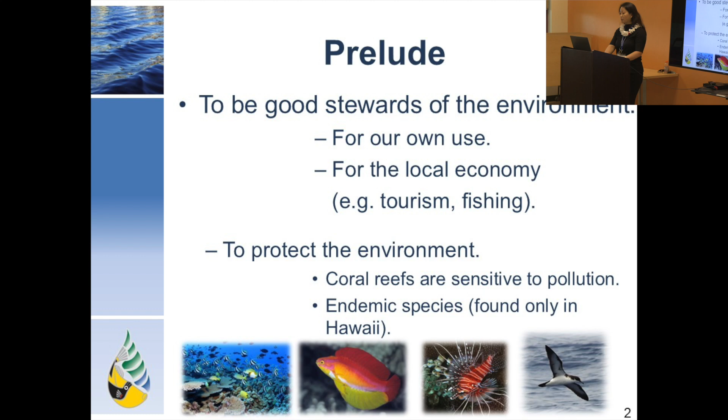Moreover, it is our responsibility to protect the wildlife, including many only found here in the state of Hawaii. To continue sustaining in this world, we need to do our part to ensure that our coastal waters are clean for every living being to enjoy.

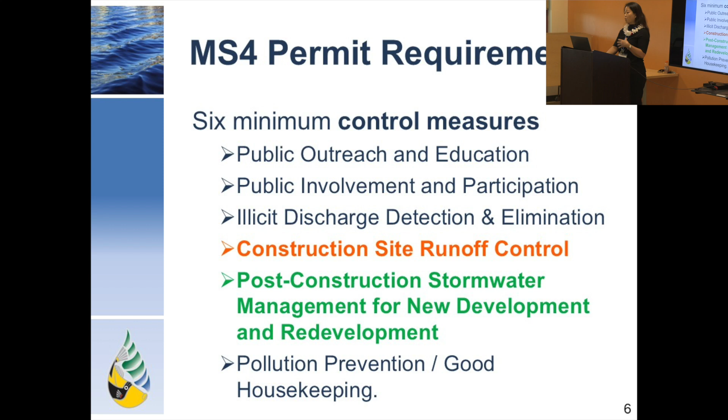So the small MS4 permit, as the one issued to Harbors, requires the development, implementation, and enforcement of our own SWMP, covering the 6 minimum pillars listed on this slide. For today's session, we'll be focusing on construction site runoff control and post-construction stormwater management for new development and redevelopment.

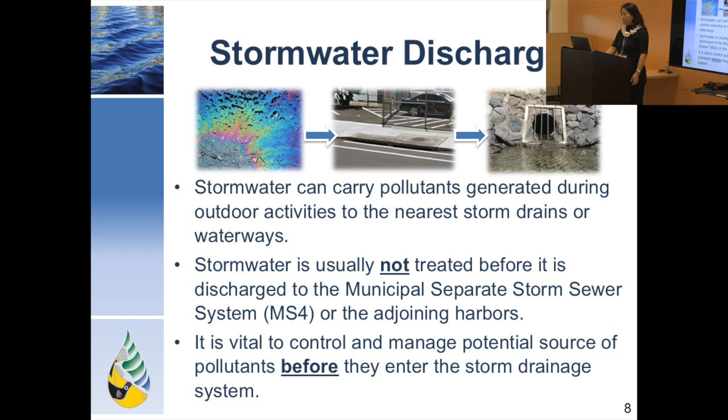So how exactly can construction activity potentially impact the environment? I think a majority of people attending the training session today are experts of different firms. Impacts can occur when stormwater runoff carries pollutants from construction sites to nearby storm drains or waterways. Once the stormwater has entered the storm drain system, it flows and discharges directly to the adjoining receiving waters. Therefore, it is essential to manage and mitigate the contact of rainwater with potential sources of pollutants before they enter our storm conveyance system.

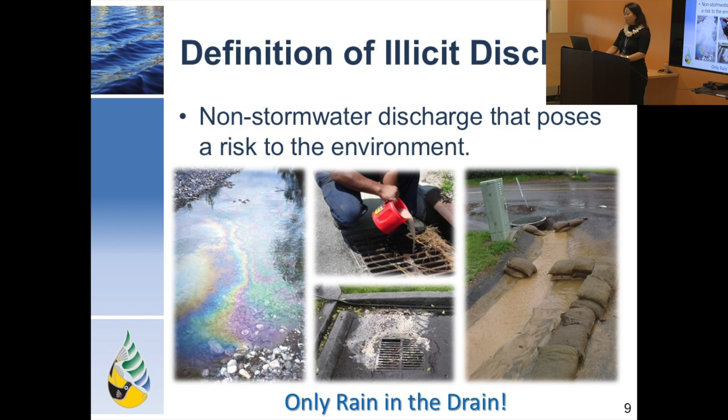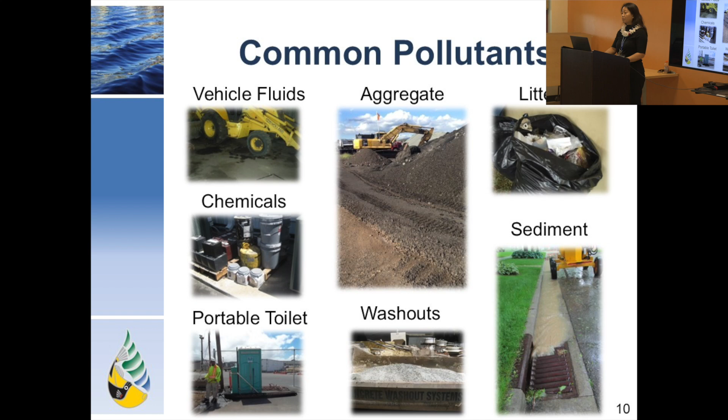Sediment is one of the most common pollutants found on a construction site and in our waterways. It can be generated through surface soil erosion or in situ soil excavation. Two key definitions are involved: erosion and sedimentation. Erosion is a process by which the land surface is worn away by the action of water or wind, and sedimentation is the movement or settling out of suspended soil particles.

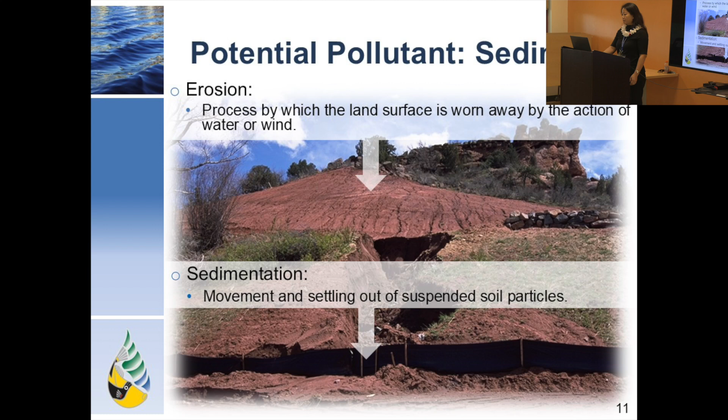Storm drain systems of different kinds are usually designed to minimize localized flooding by collecting and diverting stormwater away from roadways and ground surfaces. If not properly contained or managed, sediment can easily fill up storm drains and catch basins and clog pipelines, consequently causing damage to the local environment and public health. Also, excessive nutrients from the sediment can increase algae growth.

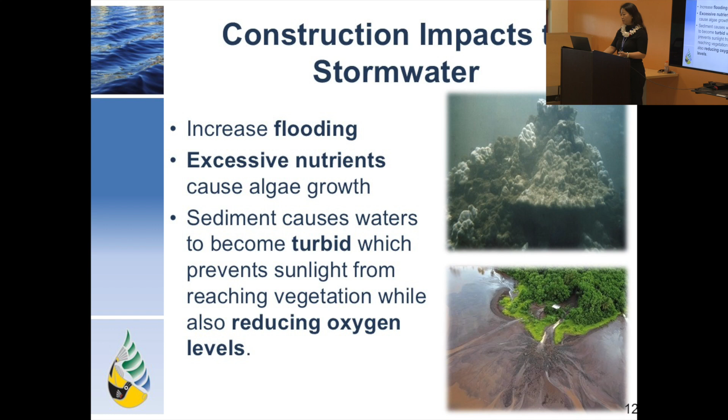It can also cause the water to become turbid, reducing or preventing sunlight from penetrating through and reaching the corals, and subsequently reducing oxygen levels that may impact marine life. That's the flow.

If your project will disturb 1 acre or more, or it is part of a larger common plan of development or sale, it is very likely that your project would be subject to NPDES program requirements administered by the DOH Clean Water Branch.

HAR 11-55, Appendix C, outlines the requirements for regulated construction sites. Keep in mind that all NPDES regulated construction projects within Harbor's jurisdiction are not only subject to DOH inspection, but also subject to Harbor's construction site inspection as well.

Starting with this slide, we will be reviewing the project forming and execution process at Harbor's, to give the audience an overview. A typical project at Harbor's will generally follow the process shown on the slide, which includes project scoping, then design, then review, then followed by construction.

And if there's any PBMP involved, or other purpose for the particular construction, it will also be subject to long-term operation and maintenance. So we'll dive into this in the next few slides, with a focus on the environment and stormwater management department.

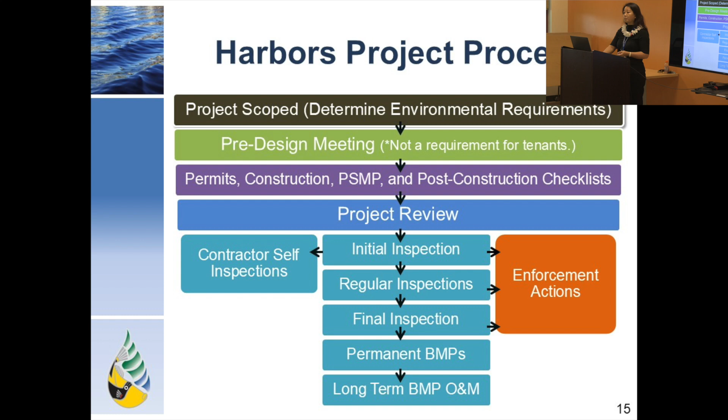During a project's design phase, the scope of the project will be finalized by the design engineers, and the relevant environment requirements will be assessed and identified. If needed, a pre-design meeting will be held, depending on the complexity level of the project, and the applicable Harbor's forms listed here should be completed by the design engineers.

For non-exempt projects less than 1 acre, the design engineer will need to complete a notification form for projects less than 1 acre. For projects subject to NPDES NOI C permit requirements, in addition to the NPDES application and preparation of the SWPPP, the design engineer will also need to complete the construction design review checklist, the post-construction BMP plan review checklist, and the post-construction stormwater management plan.

I was just sitting in on an airport program, and it sounds like they have a very fancy system in place to manage a project from cradle to grave on the environment side. That was a very efficient system of work. If that's applicable to Harbor's program here, maybe we'll do something similar to help streamline the process down the road.

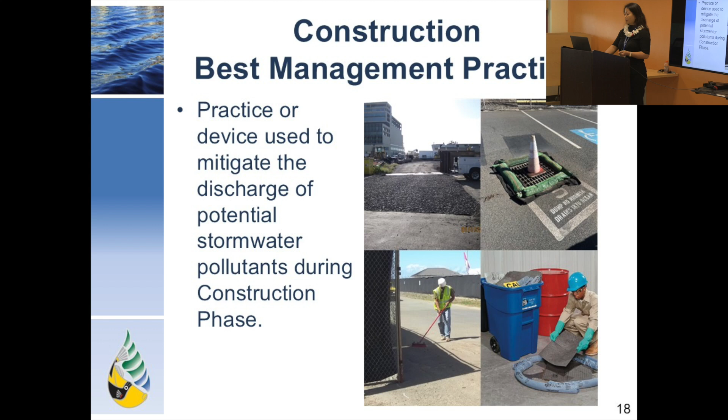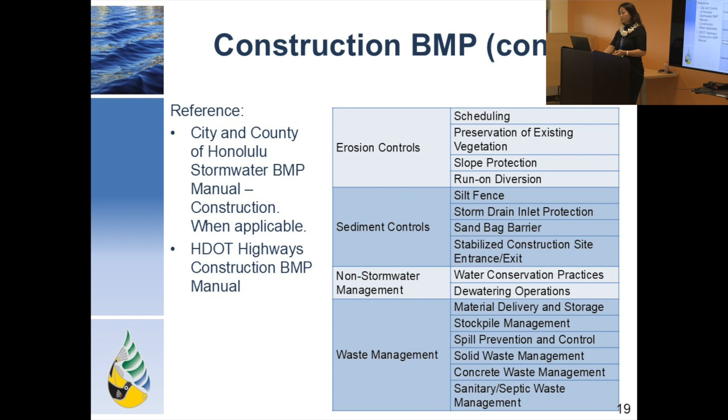Harbors has adopted the city technical rules, the BMP manual for construction, which provide information about the design details that should be followed. Any applicable BMPs from highways or airport construction BMP manuals can be considered acceptable. The BMPs listed here are some examples from city and county construction. I'm not going through the full list, you can review it in detail once you visit our website and find all the details.

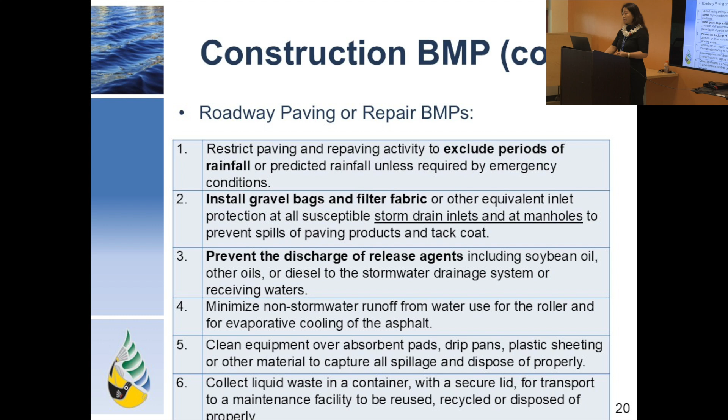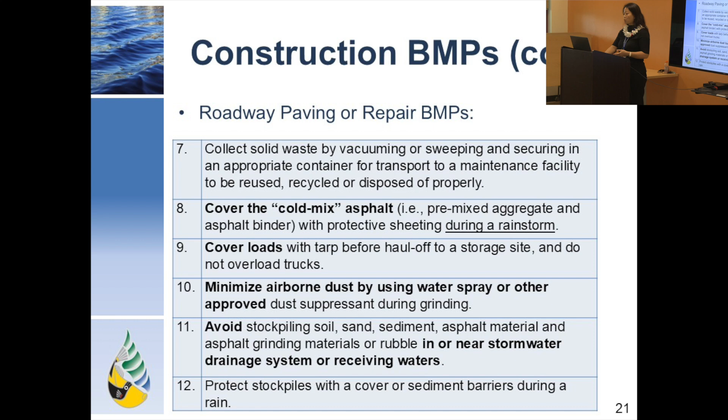If you're working on a roadway paving or repair project, please ensure you implement the BMPs listed on this slide and the next, such as paving when rain is not forecasted, covering all the storm drains, minimizing non-stormwater runoff, not overloading your trucks, and minimizing airborne dust by using sprinkler water on the site. The list can go on and on.

Next we'll be talking about Harbor's stormwater BMP inspections, and also we will share Harbor's expectations during the active construction phase. Harbor's stormwater management program requires inspections of non-exempt projects, those regulated by NPDES NOIC permit at the three harbors, namely Honolulu Harbor, Kalaeloa Barbers Point, and Kapolei. These inspections are conducted to identify potential or active discharge of pollutants and to ensure deficiencies are corrected to stay in compliance and to avoid being cited by regulatory agencies.

All harbor inspections include initial, recurring, and final inspections, to be conducted by qualifying inspectors. The initial inspection will be conducted after all applicable site BMPs have been installed. For the list of BMPs, we usually refer to the site-specific BMP plan or the SWPPP submitted for review and accepted by Harbors. Any deficiencies or potential violations noted during this inspection must be corrected prior to any further ground intrusive activities.

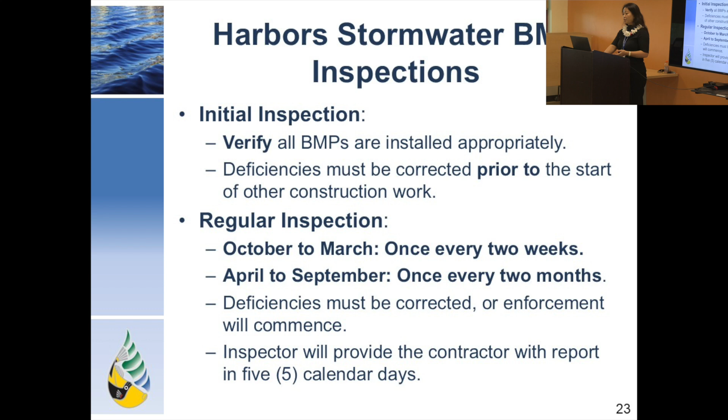Once construction work has started, Harbors will conduct a recurring BMP inspection for the duration of the project. This will occur once every 2 weeks during the wet season, which we define from October through March, and once every 2 months from April to September, which we consider the dry season. All deficiencies and potential violations noted during these inspections may lead to enforcement actions if not corrected promptly. A copy of the inspection report will be furnished to the contractor within 5 calendar days.

A final inspection will occur once construction work is completed and the site is permanently stabilized. That means no open soil, and everything either stabilized or paved over. At the same time, the inspection will also serve to ensure that the permanent BMPs called out during the design are properly installed according to specification. Deficiencies and potential violations noted during the final inspection must be corrected as well prior to completion of the project. Note that final payment can be held until all corrective actions are completed.

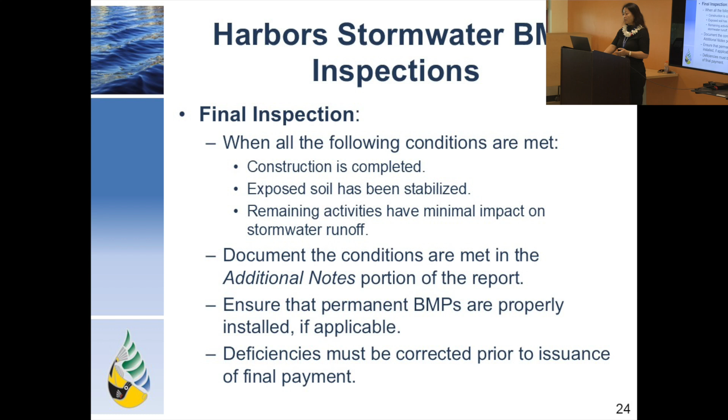Those are kind of standard language usually found either in the program manual or in the contract document.

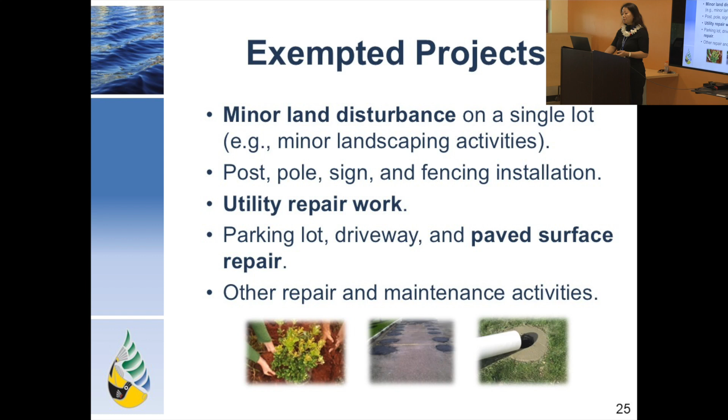At Harbor, we do exempt certain types of projects from inspections. These projects usually bring minimal impact to the environment, such as minor land disturbance, pole, sign, or fencing installation, utility repair works, pavement repair projects, or other minimal soil disturbance repair and maintenance.

All right, in the next following slide, we will discuss some common findings noticed from Harbor's inspection in the past.

The first one is the BMP plan is not available or updated. Remember that the BMP plan is a living document and will provide basic information not just to the inspector, but more importantly to the people working on the construction site. So it's a key document to maintain on site or easily accessible at certain areas. It should be promptly updated when necessary and must be kept on site. Make sure to obtain your project engineer's approval prior to updating the plan, so get consensus from Harbor's engineer before you update it.

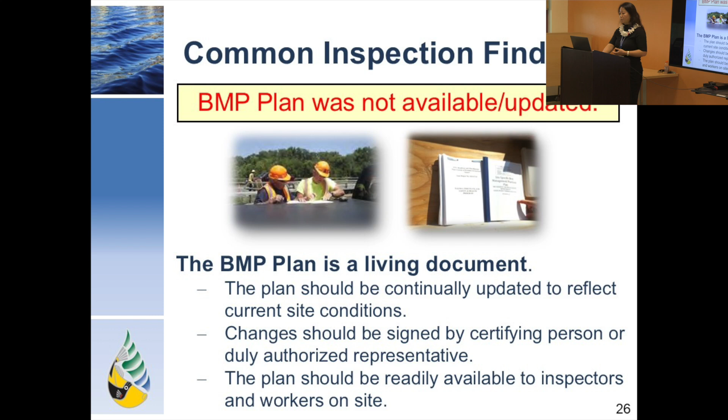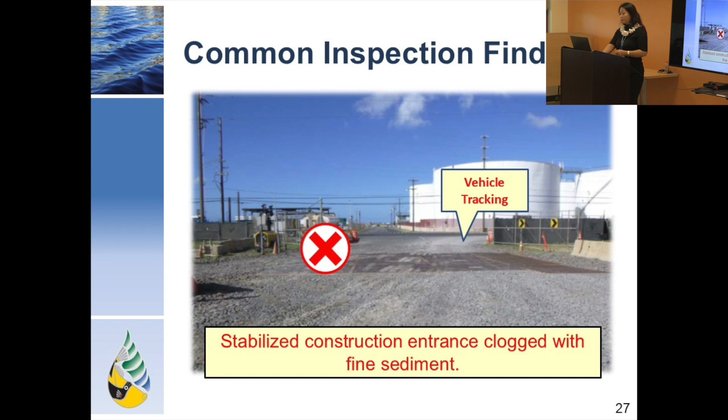The second one is stabilize the construction entrance. It's part of the construction project, and while we know it's unavoidable, we still manage the sediment to the best practical level. Tracking sediment onto the adjacent public road is easily visible to both inspectors and the public, and it can become a source for airborne dust and a nuisance. It can also easily be carried into nearby storm drains if not cleared out promptly. Therefore, it's important that the construction entrance have a proper BMP installed and maintained regularly when needed.

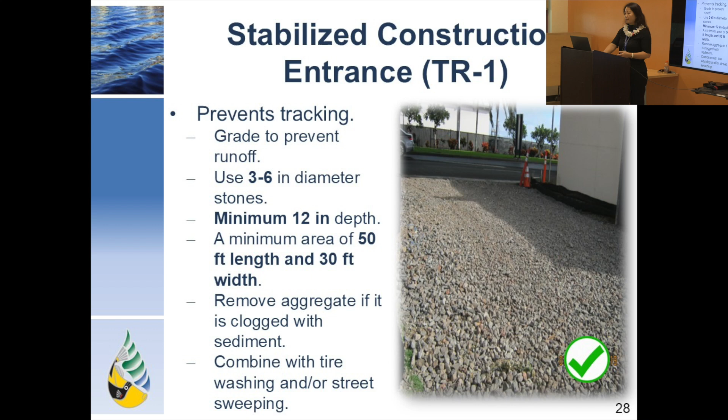In general, a stabilized construction entrance should consist of a minimum of 50 by 30 feet and be covered with 3 to 6 inch diameter aggregate over a geotextile fabric, and the maintenance needs to be carried on throughout the duration of the project as long as we have a stabilized entrance for the project.

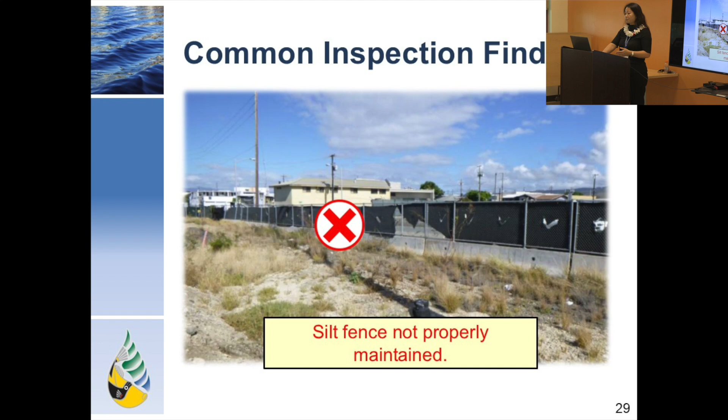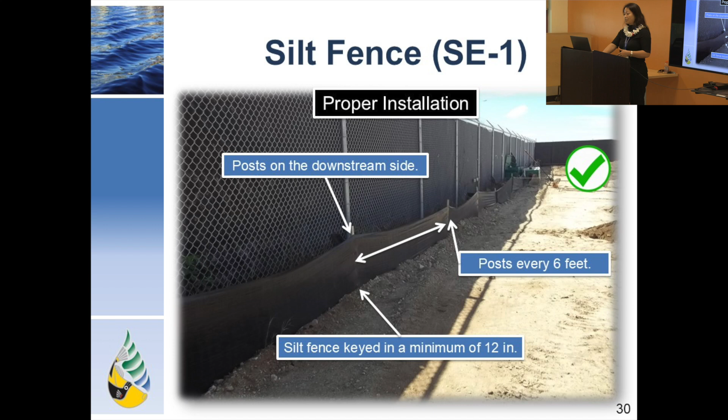Silt fence can be used to control sediment from a construction site, but it must be properly installed and maintained. If not well maintained, the sediment may be carried offsite and result in a public complaint or an illicit discharge. Generally speaking, the silt fence should be properly installed by setting posts on the downstream side of the fence every 6 to 8 feet, the fabric stretched tight, and the fence embedded in the ground approximately 12 inches to secure the bottom of the fence.

The goal of the silt fence is also to hold the sediment laden water so as to keep sediment behind the fence. Maintenance will be required to remove the accumulated sediment on the silt fence when it has reached 1/3 the height of the fence.

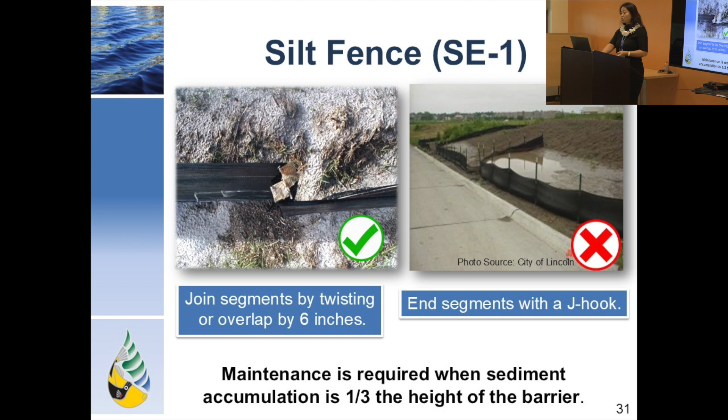The basic rules of using biosocks on your job site include: when you place it on the ground, make sure it's in close contact with the ground surface, and the ends of the socks must overlap a minimum of 6 inches, and the end of the berm should be turned up the slope to aid in containing the sediment. The accumulated sediment must be removed when it reaches 1/3 the height of the berm, and you also want to remove, replace, or repair the damaged ones on the ground.

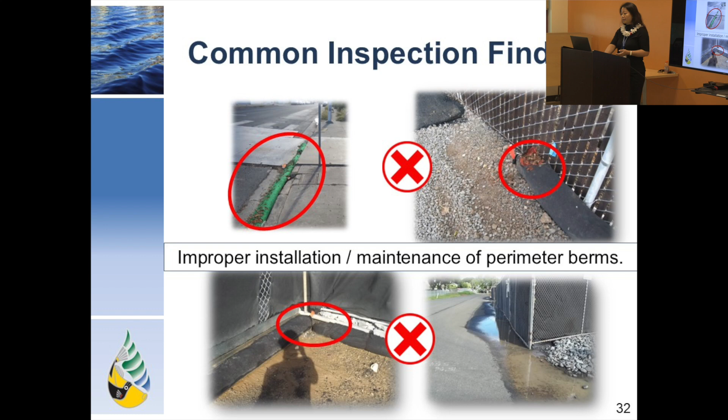Erosion control netting can be used on the site to stabilize the disturbed soil until vegetation can be established in place. This may require the removal of large rocks and other obstructions, and leveling off the ground.

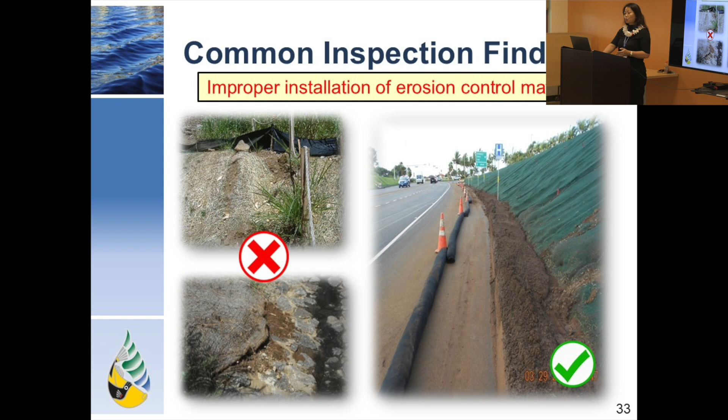The net must also be properly anchored, and this will involve trenching in the net at least 6 inches at the top of the slope, overlapping sections of the net by 2 to 3 inches, and stapling every 3 feet.

Filter fabric plays quite an important role on construction sites. It can be used to contain potential runoff pollutants and prevent them from discharging into the storm system. Since storm drain inlet protection is considered the last line of defense, it's definitely key for you to keep the majority of pollutants out, with the drain installed properly in place all around the storm system.

For the contractors, you should conduct regular inspections and make sure you replace the torn filter fabric, and make sure accumulated debris, whether close by or inside the grate's head, is removed properly.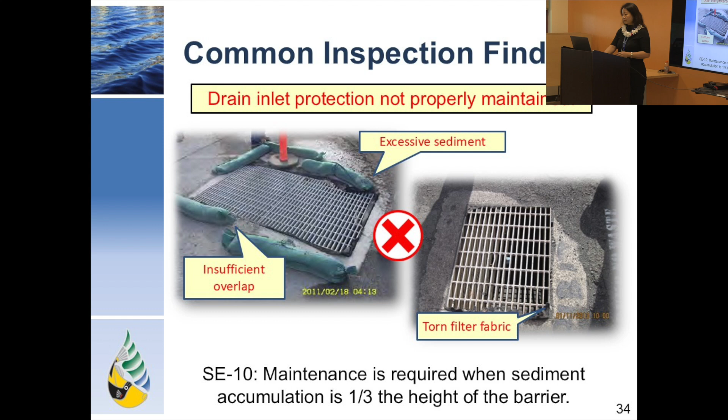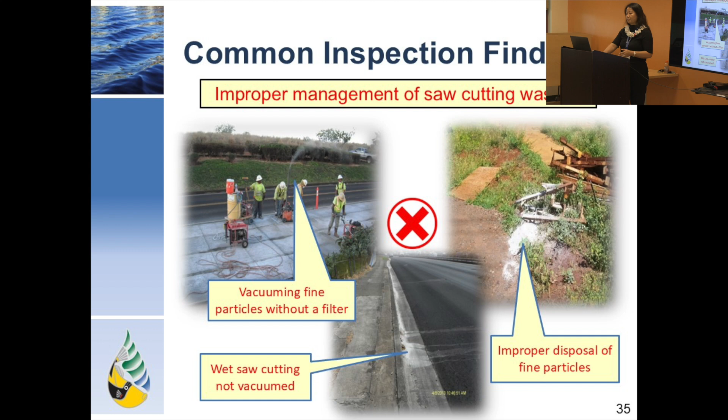Next, all concrete wash waters must be properly contained. This can be accomplished by designating a container on site and removing the debris once the water has evaporated. Additionally, a cover may be needed if rain is forecasted, to prevent the container with wastewater concrete from overflowing.

It's important to note that containment may only be filled up to 75% capacity, and temporary concrete washout facilities should be maintained to provide adequate containment capacity, with a minimum freeboard of 4 inches for above-grade facilities and 12 inches for below-grade facilities.

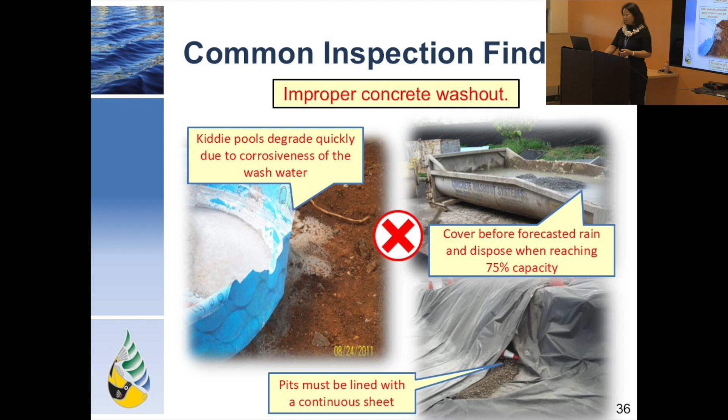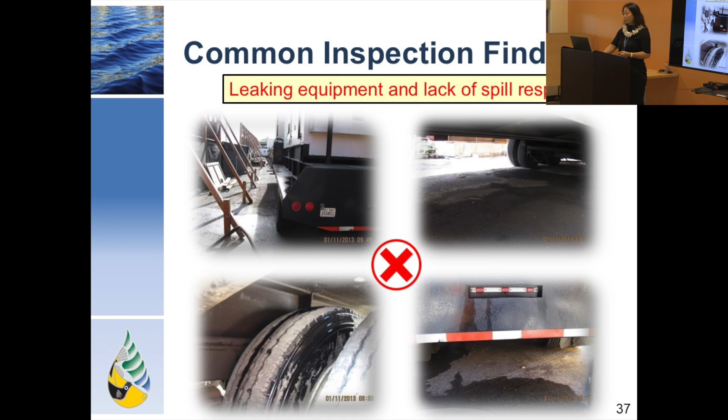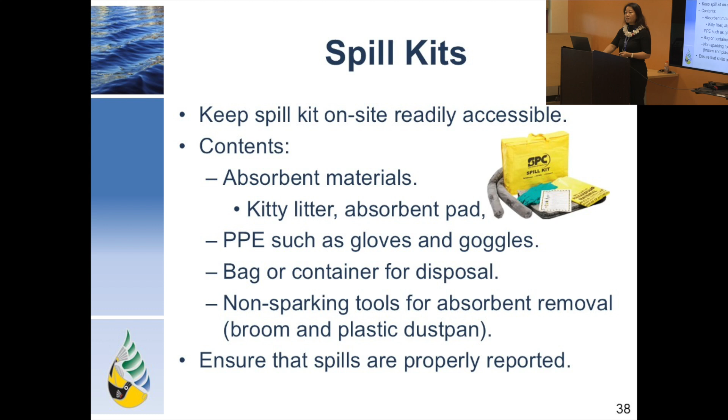Spills and vehicle leaks are a common source of pollutants on the construction site. Vehicles and equipment should be inspected regularly, and if a leak is observed, you want to make sure the spills are cleaned properly. All construction workers should be trained on proper spill response. Spill kits should be kept on site and properly stocked. All spills should be immediately responded to and reported to harbors, project managers, and engineers, and of course to other regulatory agencies if it's exceeding the reporting threshold.

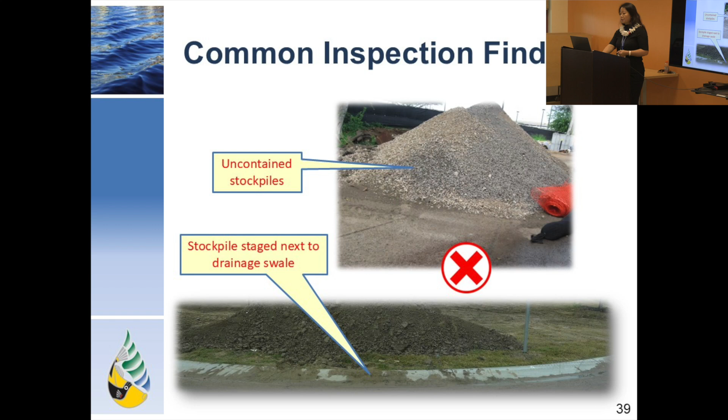Stockpiles - that's a fun part of the construction site. Stockpiles of aggregate material must be properly contained if they are to be stored for more than a day. Additionally, stockpiles should be positioned away from waterways such as a drainage swale, storm drain, stream, or other surface water to prevent the material from being carried away in stormwater discharge.

Improper disposal of paint waste and painting equipment cleanout can introduce pollutants to the stormwater as well. Proper containment should be set up to contain any paint chips and drips, and you want to mix and store the paint within the secondary containment setup. Lastly, you want to properly dispose of all the paint waste.

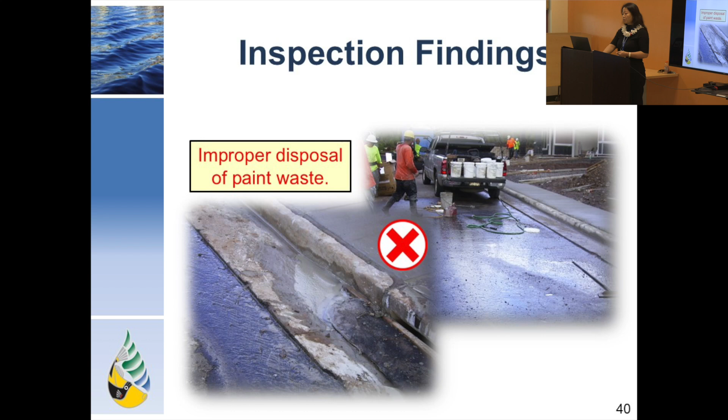Hazardous materials must be properly stored on site as well, particularly liquid containers of 55 gallons and above, which should be equipped with secondary containment. They should also be inspected regularly to ensure they're in good condition and properly labeled or marked. It's highly recommended that hazardous material be stored in covered areas to minimize exposure to stormwater.

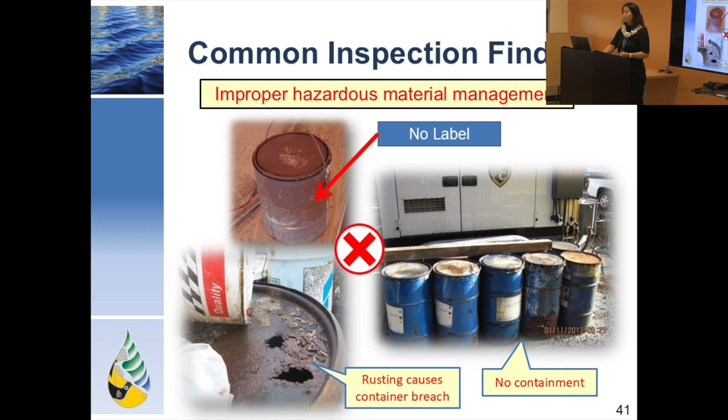Shown on this slide are some common findings in housekeeping and waste management. Trash and debris throughout the site can be picked up by stormwater and carried to adjacent harbors or state waters. You probably want to make it a regular practice at your site to clean out the debris by the end of each working day.

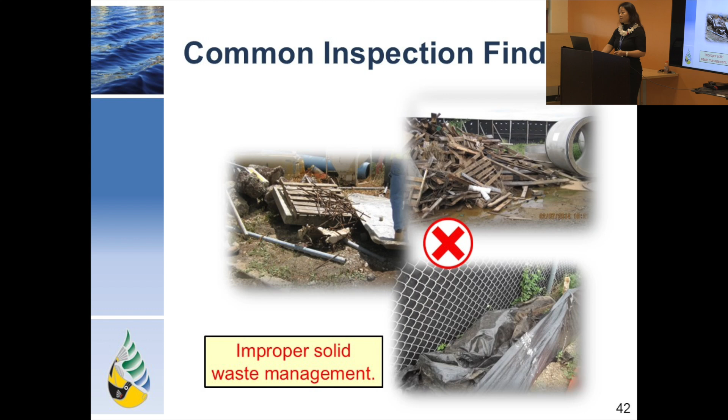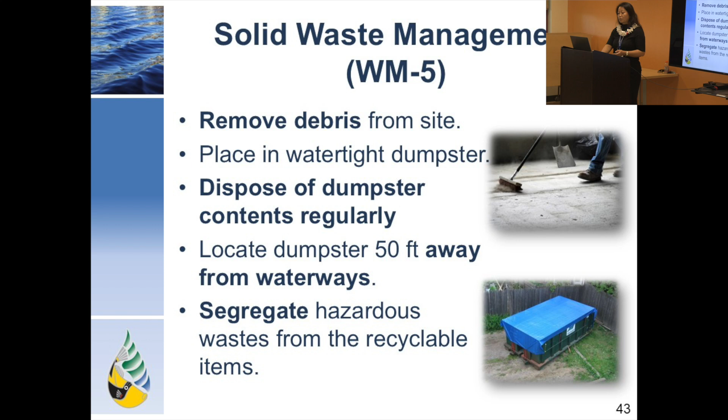When it comes to solid waste management, some good practices include the bullet points listed here, such as removing debris from the site and disposing of the contents regularly, making sure you locate your dumpster 50 feet away from waterways, and also, very important, segregating your hazardous waste from the ones that can be recycled.

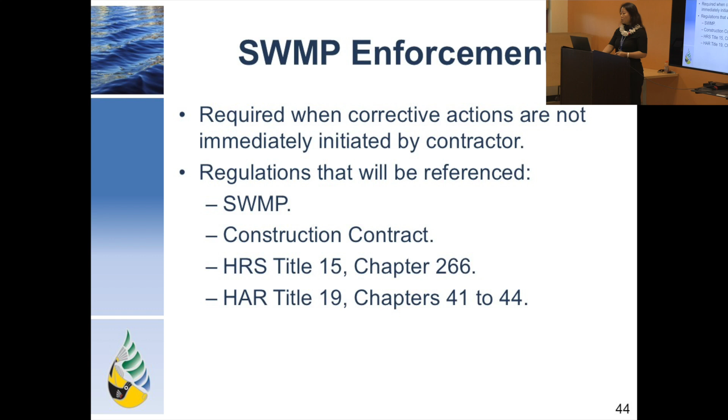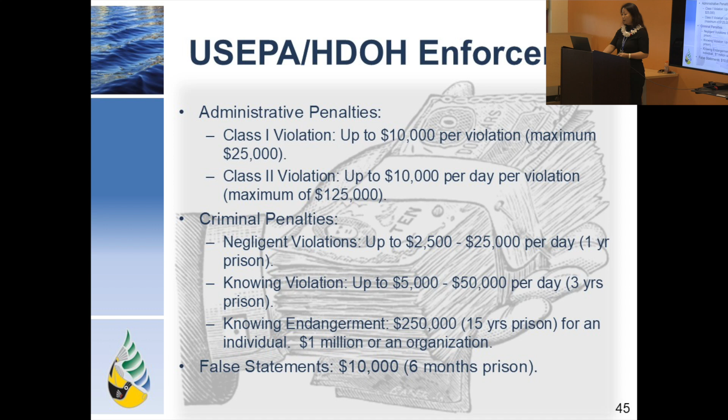Throughout the construction phase, enforcement actions can be implemented where necessary to ensure corrective actions will be completed timely. Enforcement will reference the Harbors SWMP, the construction contract document, Hawaii Revised Statutes, or Hawaii Administrative Rules where applicable. Once a regulatory agency conducts their investigation and enforcement, there may be specific penalties associated with each violation that are compounded each day the violation occurs. The potential for penalties shown on this slide can be avoided if all parties working on a construction site follow the requirements - basically do the due diligence.

Okay, harbor's post-construction program. Harbor's post-construction program is considered a complementary component to the construction program. Through the next few slides, we'll discuss some requirements while providing guidance for project-specific planning, selection, and designing of a post-construction BMP to fulfill the NPDES permit and Harbors SWMP requirement.

Post-construction BMPs are of equal importance because they will continue to address potential stormwater pollutants long after a construction project has been completed. For example, if a construction project is for a parking lot, a green parking lot - such as porous pavers or a central grass swale to provide filtration for runoff from a paved area - is considered post-construction. They can help reduce the runoff quantity, and also assist with reducing pollutant loads such as oils, grease, and some dissolved metals.

Another important thing about the post-construction BMP is that if you do include one, it should be paired with an operation and maintenance plan to ensure that it continues to function effectively for the life of its intended use.

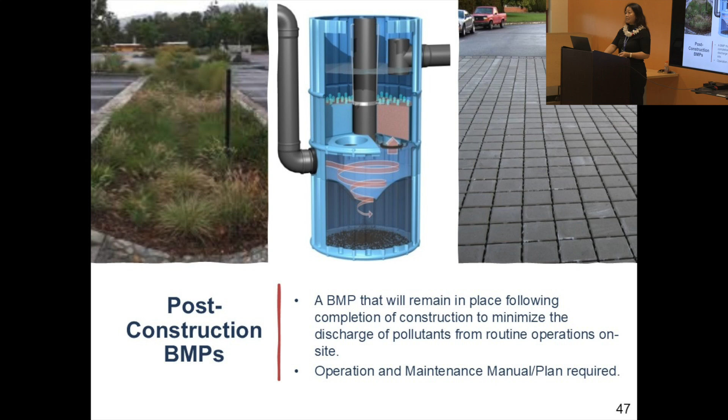Post-construction BMPs must be considered and evaluated for a project disturbing land of 1 acre or more. There are, of course, some exceptions, which include a project mainly involving maintenance, reroofing, interior renovation, some utility work, or replacement of damaged pavement.

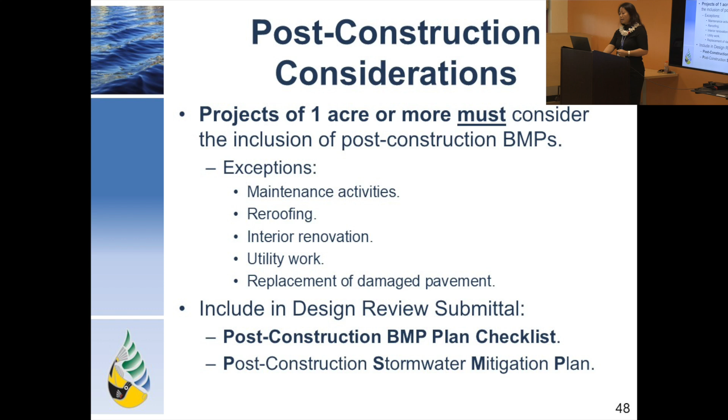So the design engineers will submit the permanent post-construction BMP plan checklist, as well as the post-construction stormwater mitigation plan, to Harbor's for review.

The post-construction stormwater mitigation plan, or PSMP, begins by completing an existing drainage study of the area, and the designer then identifies the source of potential storm drain pollutants that may be present during regular site use following the completion of construction.

The designer would also include the drainage study, the chemicals of potential concern, and a discussion on the selected post-construction BMP that will address those particular concerns. All this information will be gathered and compiled into the PSMP.

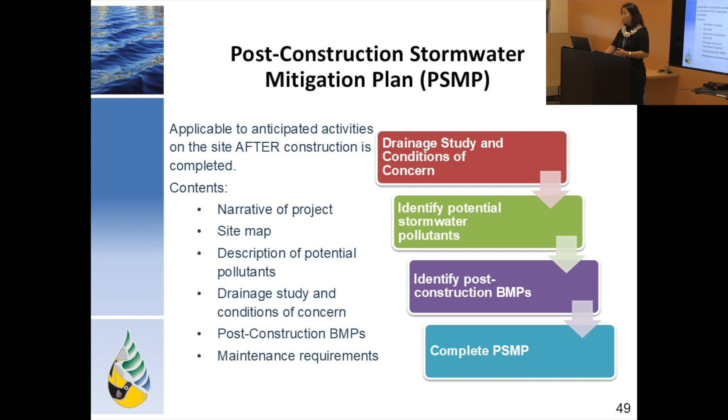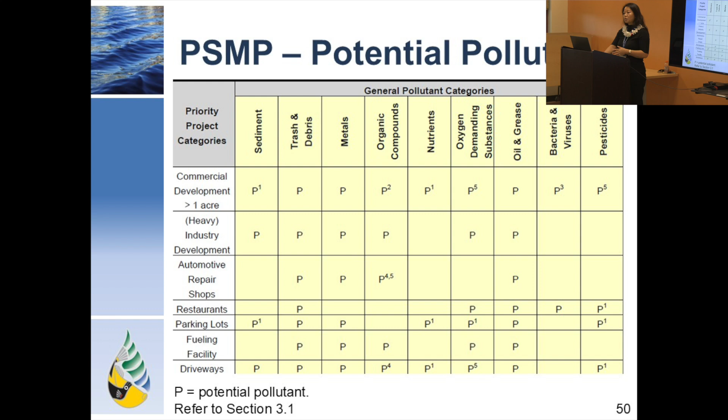This table will provide more guidance on the types of post-construction pollutants that can be expected based on land use. All these details can be found on Harbor's post-construction program plan.

The type of post-construction BMP is divided into three main categories. Remember, low-impact development must be considered and evaluated first, followed by source control, and then, if neither is feasible, treatment control BMPs must be evaluated.

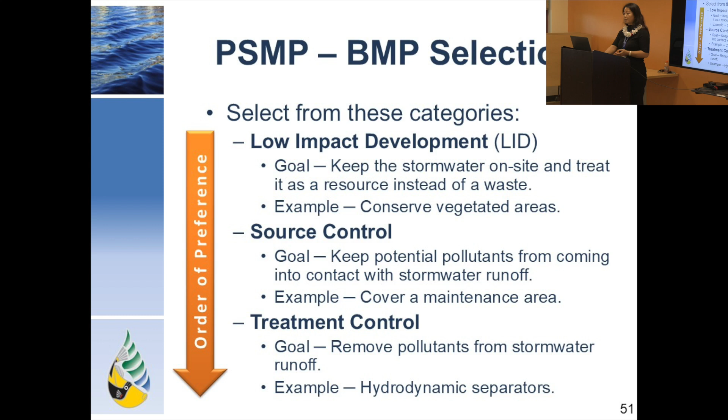Designers can refer to city and county rules guidance when developing a PSMP, in particular the stormwater BMP guide and the rules relating to storm drainage standards.

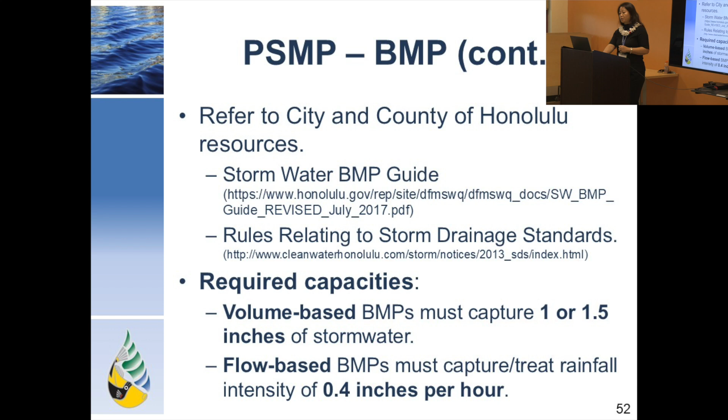As a rule of thumb, for sizing volume-based BMPs, it must be able to capture about 1 to 1.5 inches of stormwater, or if it's a flow-based BMP, it must capture and treat 0.4 inch of the design volume per hour.

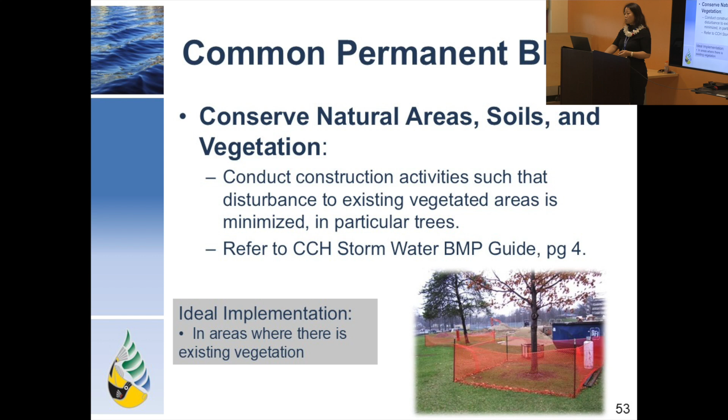In the next few slides, I'll briefly share some common and permanent BMPs we see around communities. The first one is to conserve the natural areas, soils, and vegetation.

The next one is a vegetative swale, followed by a planter box. Here I want to introduce a very innovative, inexpensive one called Grattix — something you can even make yourself, and it can be used to help filter pollutants.

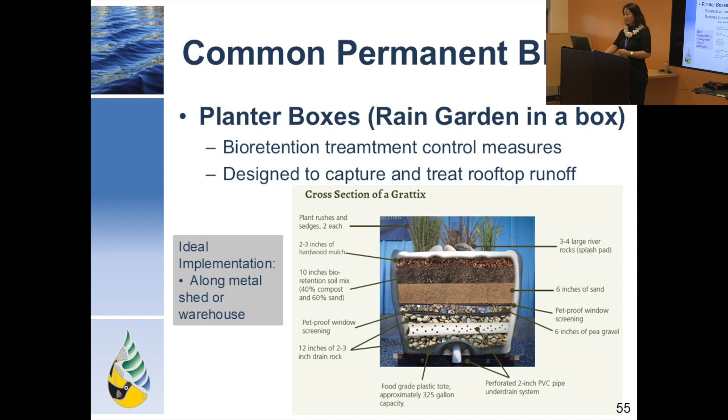As part of the design of the container at Harbor's, we're planning to make some changes to the plan, but this is still considered a good permanent post-construction BMP.

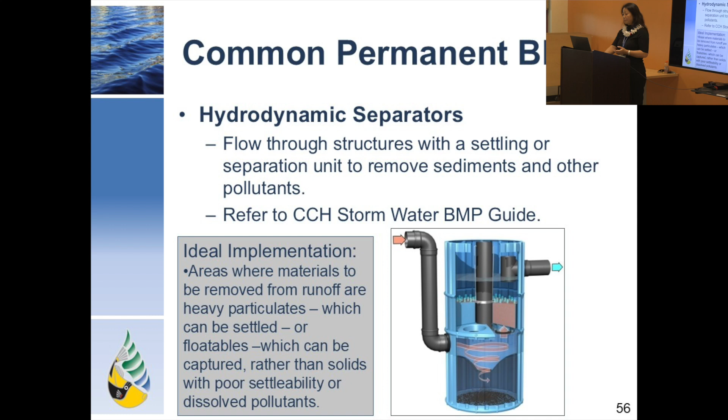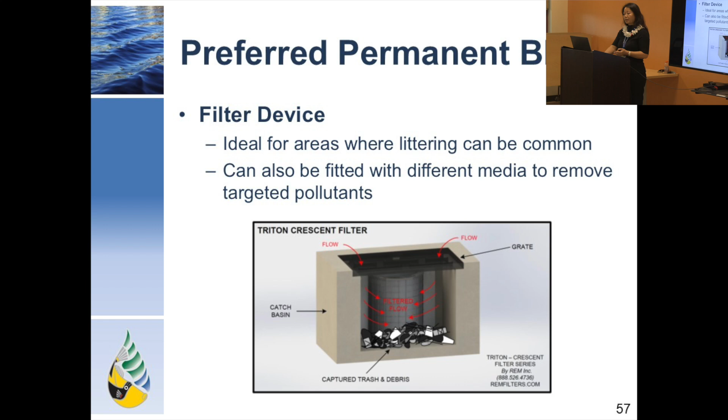Harbor's has instituted a stormwater management program to protect our coastal waters and achieve compliance with environmental regulations. It is now a standard practice for construction and should be followed by all parties involved.